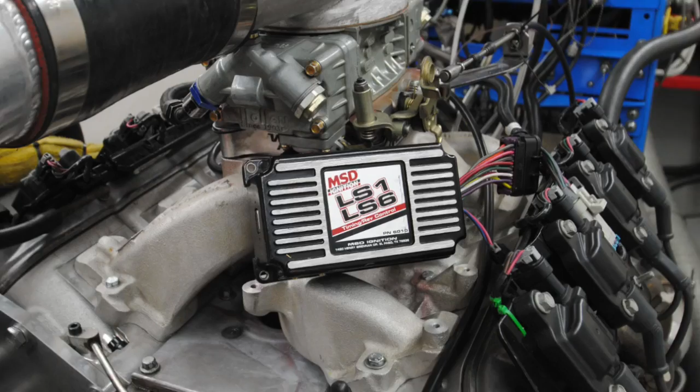Hey Richard, my tune was spot on and I still hurt my motor. Well, the average air fuel was right, but the individual cylinder air fuel was not.

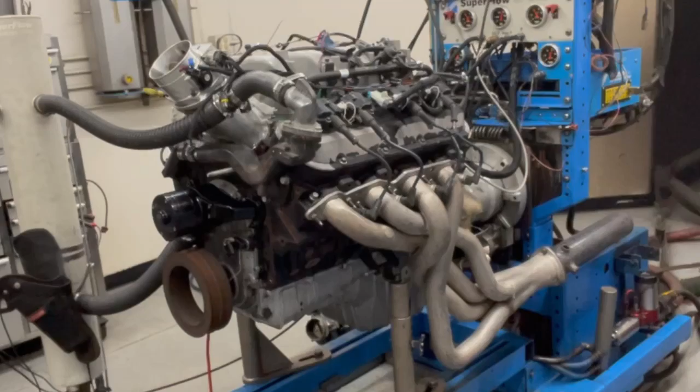So what we normally do is run the motor, tune it accordingly, and put it in a nice safe air fuel range, and then start adding timing because we know it's safe. Well, I'm here to tell you it's not always safe. Just because it has the right air fuel in those 4 cylinders as an average doesn't mean that every cylinder in the motor has that air fuel ratio.

I'm going to show you, and the way we do that is we've hooked up 8 O2 sensors, 1 in each one of the primary tubes of our headers. We're taking individual cylinder readings, and I'm going to show you why this average number that we normally tune with isn't accurate, and how you can definitely hurt your motor when one cylinder is bad, because all it takes is for it to be too lean for too long, and it's too bad.

Let's jump right in here in part 1. We're going to take a look at our naturally aspirated combinations using both a single plane and dual plane intake manifold. I'm going to follow this up in part 2, where we add boost from a very cool Vortech supercharger and a blow-through carburetor. Is the single plane and dual plane different? And also, will it be different when we add some boost?

Okay guys, as I said in the introduction, I'm going to show you why it's possible to blow up the motor even when your air fuel looks like it's correct, because it might not be correct in every cylinder, even if we're taking a reading on either one side or the other of the motor. Each individual cylinder may be wildly different. I'm going to show you exactly what I'm talking about.

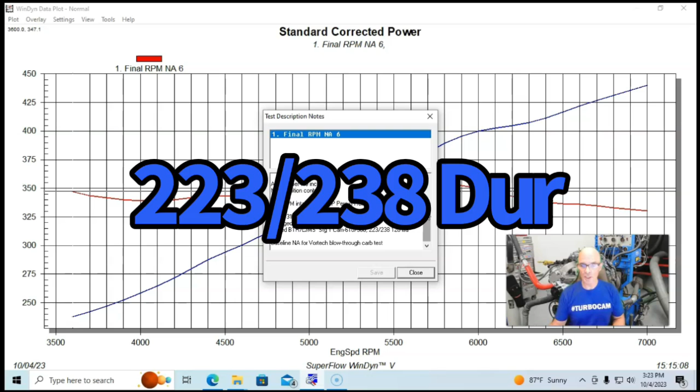We've got a 4.8 liter. It has JE dome pistons, otherwise it's stock. On the bottom end, it has TrickFlow 205 heads. It had a Brian Tooley Racing Stage 1, a positive displacement blower cam. It was a 610 586 lift, a 223 238 degree duration split, and a really wide 120 degree lobe separation angle.

We ran this thing carbureted, and I ran it with a single plane and a dual plane, and then we ran it with a single plane and a dual plane under boost, and we monitored the air fuel in all of the cylinders to find out what the distribution was like. NA on both of the intake manifolds, and then supercharged on both of the intake manifolds to see if there's any change on all of those different combinations.

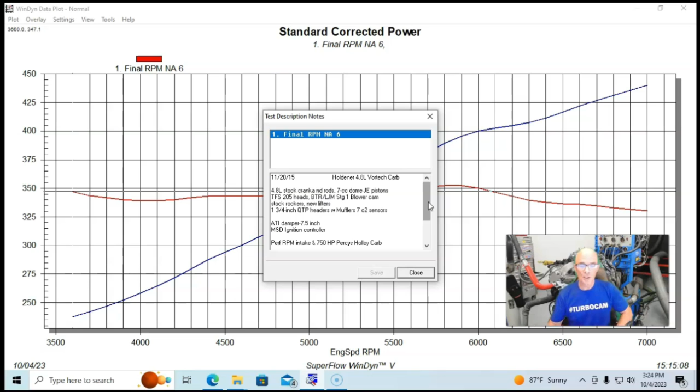So run with a 750 carburetor. This thing also had an MSD ignition controller, an ATI dampener on it, and we had a set of 1 3/4 QTP headers on it.

So we ran it first with a Performer RPM dual plane intake manifold and a 750 Holley, and our combination produced 440 horsepower at 7,000 RPM and 352 foot-pounds at 5,800 RPM.

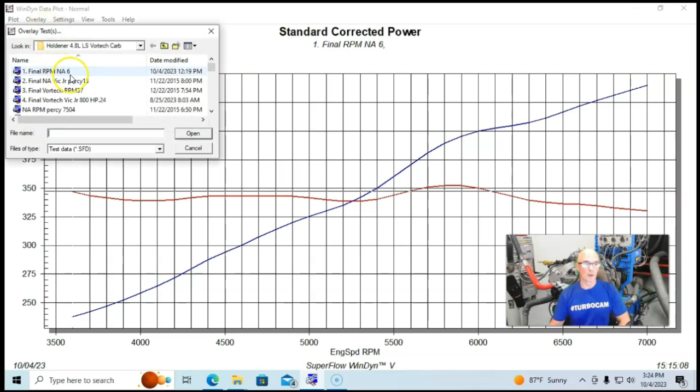Here's what happened when we replaced the dual plane with a single plane Victor Jr. It's showing that it made a little bit less power, and in full disclosure, we didn't spend a whole bunch of time tuning this thing, and you'll see in the air fuel curves what I'm talking about. But the dual plane was around 13-to-1 up there, and the single plane was like 11-6.

The problem, as we'll see in the air fuel curve, is that trying to tune one specific spot on the RPM range affects all the rest of it. What I want you to take a look at is typical of single plane and dual plane manifolds. The dual plane makes basically a better power curve all the way through, essentially. But notice below 5,000 RPM, the single plane has a dramatic drop in power, which we always see on a single plane versus dual plane comparison.

The dual plane makes more low speed power, and at some point the single plane usually crosses over, and probably would do that here if we were a little more mindful in our tuning. Now let's take a look at the air fuel curves associated with both of these combinations, then the individual air fuel curves on our NA combination, and jump right over to boosted.

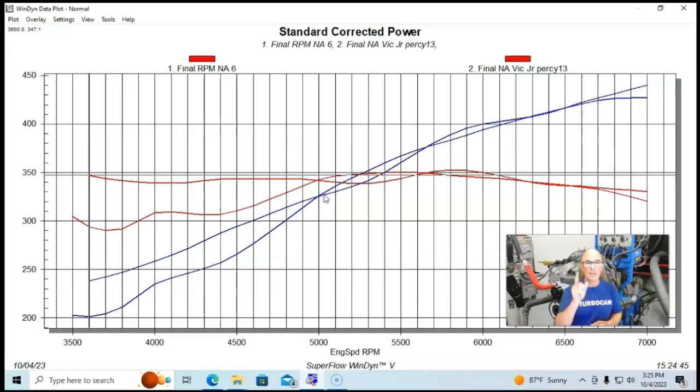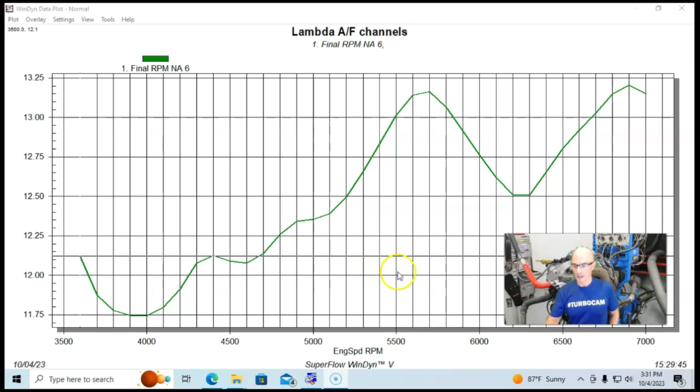Okay, we've taken a look at the power difference between our single plane and dual plane. Pretty normal stuff - the single plane makes less power down low and usually makes more power at top, and I'll show you why it didn't do that here. Since I know that's going to come in, I'm going to move myself out of the way here.

So this is the air fuel curve offered by the dual plane with our 750 Holley. It started out down here at around 12-to-1, dipped down to 11.75, and at its leanest point was up here at 13.2, out near the power peak.

Now obviously it would be nice if we could have this thing be nice and flat all the way across at whatever our desired air fuel curve was, and we can do that with fuel injection. It's a little more difficult with carburetion to adjust it at just one spot without affecting the other.

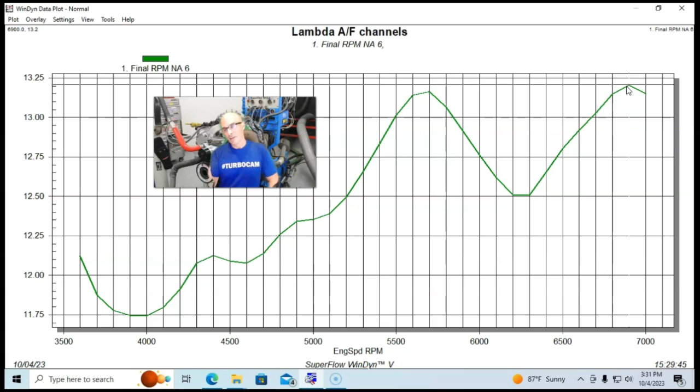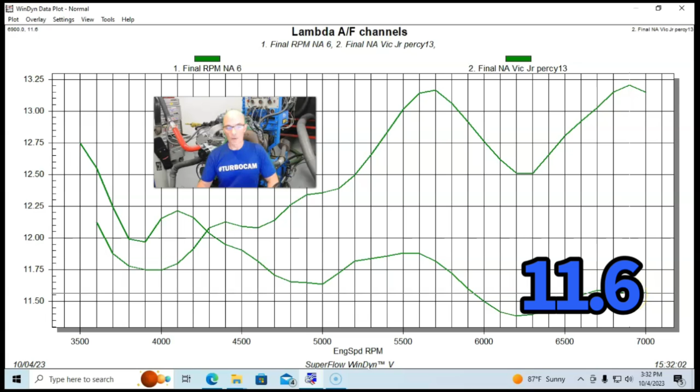But this is the air fuel curve offered on the test that we did, and here's what the air fuel curve looks like when we ran the single plane manifold. We started out a little bit leaner, 12.75, then that dipped down to 11.4 down here, and the air fuel curve reached 11.6 out here at the power peak. Probably why the single plane didn't make as much peak power as the dual plane did.

And we normally have that happen - usually there's a crossover between the two. The dual plane makes more power down low at some point, which could be below 6,000 RPM, and then above that the single plane usually makes a little bit more power.

But what I want you to note is take a look at these air fuel curves. Both of these are well within the normal range. 11.5 is still okay on an NA motor, 12.7 is okay, 11.7 and 13.2 might be a little bit on the lean side, but all this is in the normal range. If you look at these curves you'd think nothing is really going to happen to this motor, it's going to run just fine. And we made lots and lots of pulls on it.

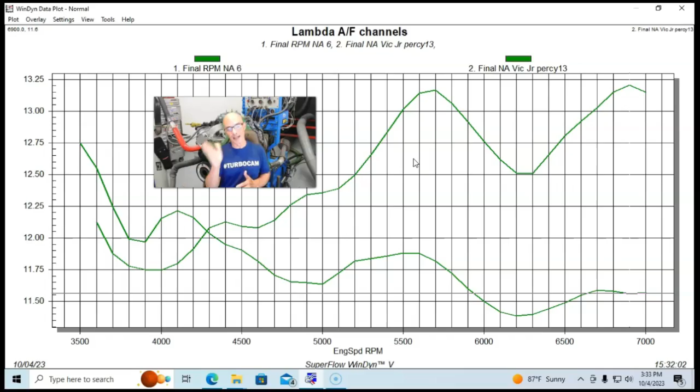But let's take a look now at what happens in the individual cylinders and compare them with the numbers we just saw. Previously I illustrated the air fuel curve offered by the dual plane intake manifold and our 750 Holley carburetor on our naturally aspirated version. It ranged, if you remember, from 11.9 to 13.2, all in the safe range, and that's basically taking an O2 sensor reading in the collector from one side or the other of the motor - an average of 4 cylinders, and it didn't range very much. It all looks safe and happy, but when we look at all the cylinders individually, we see a dramatically different story.

If we take a look at our range, we have at our richest point 10.5, where our richest point was 11.9 before when we were taking the average. And our leanest point here, at around 5,000 to 5,100 RPM, is 15.8 to 1.

So dramatically leaner than our 13.2 that we saw, and we saw that basically at the top of the RPM range. So it's not even occurring at the same RPM range. What I'm saying is, if we test the individual cylinders, the air-fuel curve offered by the individual cylinders with this intake manifold are dramatically different than we're seeing just taking an average reading in the header collector.

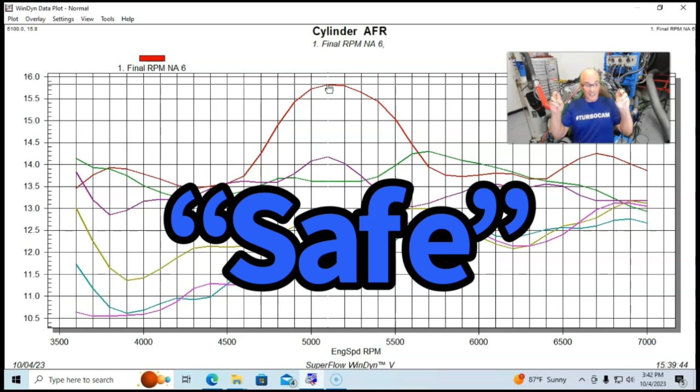This is why, even if you tune this thing running the O2 sensor the way that we normally do it, if we tuned it into a safe air fuel curve, you might still hurt the motor. Because if you're running at wide open throttle for very long at 15.8 to 1 in that cylinder, you can still hurt that particular cylinder because it's too lean.

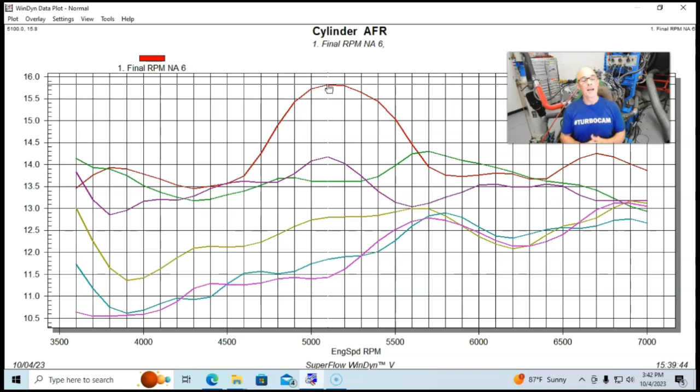Now let's take a look, and we'll go ahead and get rid of our dual plane. Let's look at the same thing on our single plane. This is our naturally aspirated single plane. It's actually a little bit better maybe than the dual plane. It just starts out very lean. So 2 of the cylinders up here at around 3,600 RPM are starting out at 15.5.

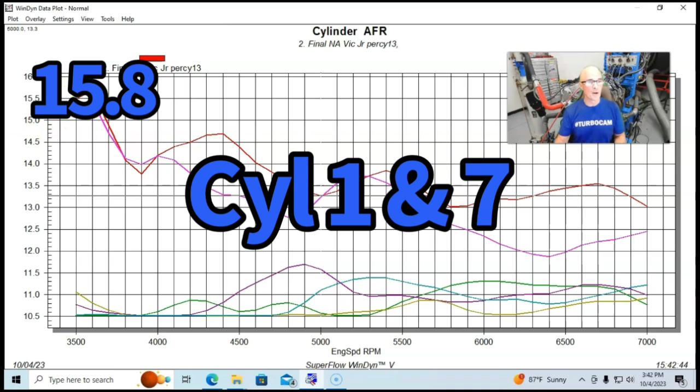And you'll remember, if you don't remember, I'll remind you, if we looked at the air fuel curve, again taken in the header collector as an average of 4 cylinders, we saw when we took our air fuel the way that we were tuning, it ranged from mid-11s up to 12.7 on the single plane. Well, here we have 2 cylinders that are as lean as 15.5. Now they come back down into a normal range, but even the cylinder out here at the power peak is 13.5. So that's still way too lean in that one cylinder.

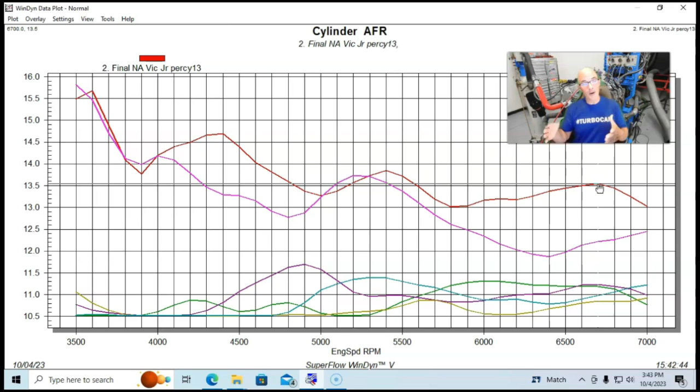It starts out way too lean and continues to be way too lean. And so even though all the rest of them down here are in the 10s and 11s, which is very, very safe, we have one that's 11.7 or 11.8, but we have one of them that's 13.5 at wide open throttle where you're making big power. And this is why, even when you're tuning and reading an air fuel meter individual cylinders can still be wrong. Okay, guys, so real quickly, what is our takeaway from all of this?

Well, it looks like neither the single plane or the dual plane have really optimum air fuel distribution for all the cylinders. As we saw, it looked like the single plane was kind of trending. It started out lean and then started trending rich, but we still saw a fairly big disparity. I mean, we saw changes from 10.5 to 1 to 15.8 to 1 in individual cylinders, and the same thing on the dual plane from 10.6 up to 15.8. And we saw that not only did the distribution change based on the intake design, but it also did it over the RPM range for the individual intake design. So we have lots of things.

Now, how do we cure this? I honestly don't think that we can cure a problem that's inherent in the intake manifold with any kind of carburetor. I don't think a better carburetor is the answer. I just think this is inherent in the intake design. The one way to cure it, obviously, would be to put electronic fuel injection on it and then still have to go in and do individual cylinder tuning to make sure that they're all even.

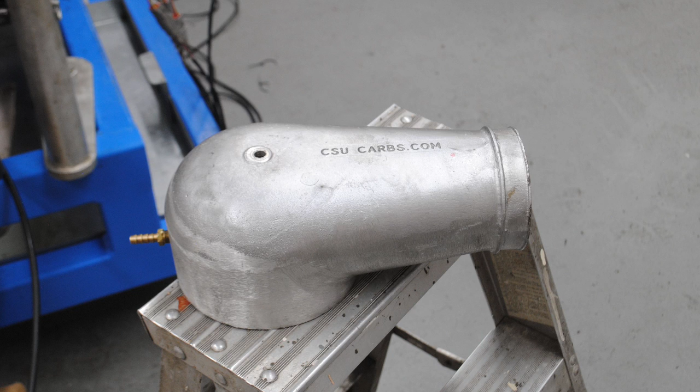I'm curious now what happens in part 2 when we add the Vortech supercharger to it and we're going to be blowing through a CSU dedicated blow-through carburetor. Will blowing the fuel into the intake manifold help or hurt air fuel distribution for the different intake manifolds? Let me know what you think in the comments.